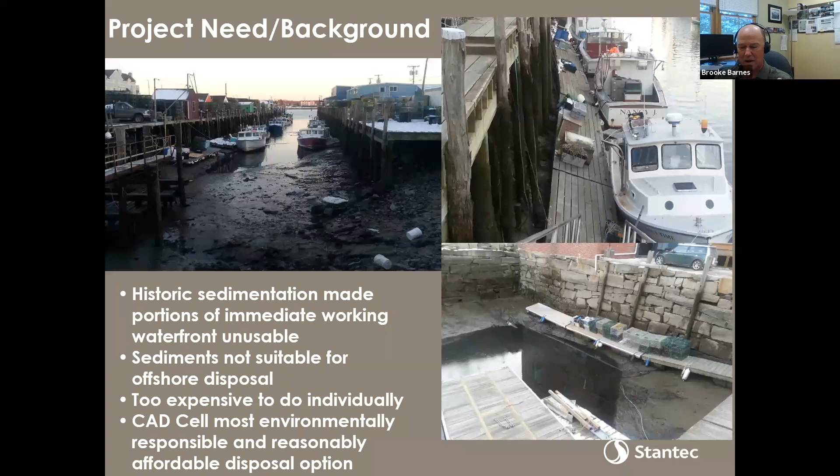If you want to go to the next slide, Michael. This concept of a CAD cell - dig a hole in the harbor and put these materials in it - has been around for about 30 years. It's been done in Boston, Bridgeport, Hyannis, Providence, New Bedford. It's the least expensive option, the best from a human health and ecological risk perspective, and it's simple. There's been a great deal of post-construction monitoring to make sure the concept is actually working out, and it's working out very well in those places that have been done before.

Back to Portland Harbor, this is just an illustration of what's been lost - in red, basically not really viable berthing anymore, and yellow, diminished berthing. This is just one piece of the Portland waterfront. It doesn't represent where all the dredging will occur, but a 26% loss in the working waterfront is quite a bit. The idea is let's get that back and get everything associated with it back. Roll to the next slide, Michael.

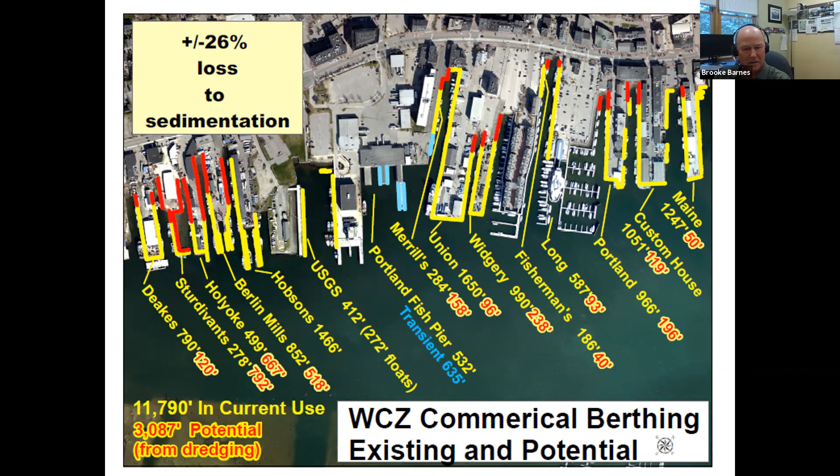The biggest thing when you're trying to figure out what to do on a scale like this is you need to engage as many stakeholders as you can and make sure you're covering all the people who need to be covered and have an oar in the water, so to speak - both from a regulatory agency perspective, but also the users and the municipalities of Portland and South Portland and the Portland Harbor Commission. Those three entities really were the movers and shakers behind this. If you roll to the next one, Michael.

So the permitting itself needs an Army Corps permit, needs National Marine Fisheries Service review, needs DEP, needs local permits. There's really two projects.

One of them is the dredge project around the piers, and the other is the CAD cell itself. They were permitted as two separate projects, but of course they're completely interdependent, and that was recognized through the permitting process. But it took a lot of meetings with agencies and a lot of meetings with stakeholders to figure out what the best path was, and what specific regulatory requirements would apply.

This is the first time this has been done in Maine, so it was new to the jurisdictions. And the final concept we came up with was the Harbor Commission would actually be the applicant for these activities, along with the cities signing on, but the Harbor Commission was going to be the key mover.

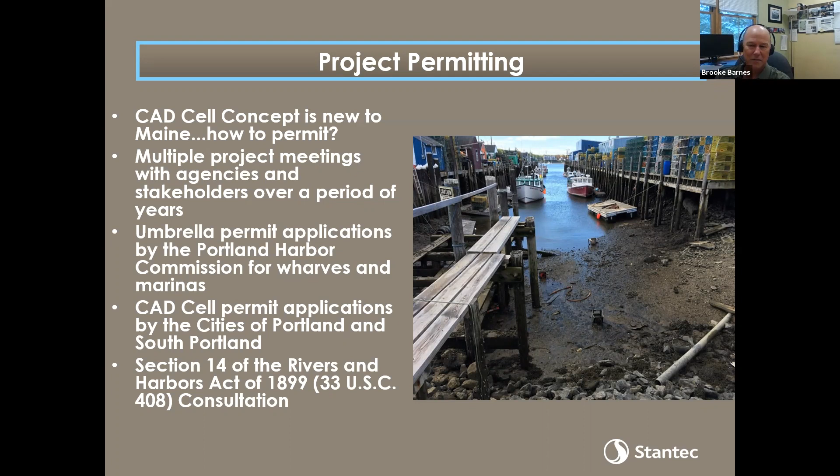So where did the money come from to get this started, to get these early stages? A brownfields grant to the Harbor Commission, focused on the dredging, and that was the first time the brownfields program at EPA was used to look at this kind of issue. Then CAD cell funding, evaluating that, doing the permitting and everything for that, came through MDOT funding and funding from the cities of Portland and South Portland.

So it really was multiple entities and multiple funding sources that got us to the place we are today, which is permits in hand and now seeking the funding for construction.

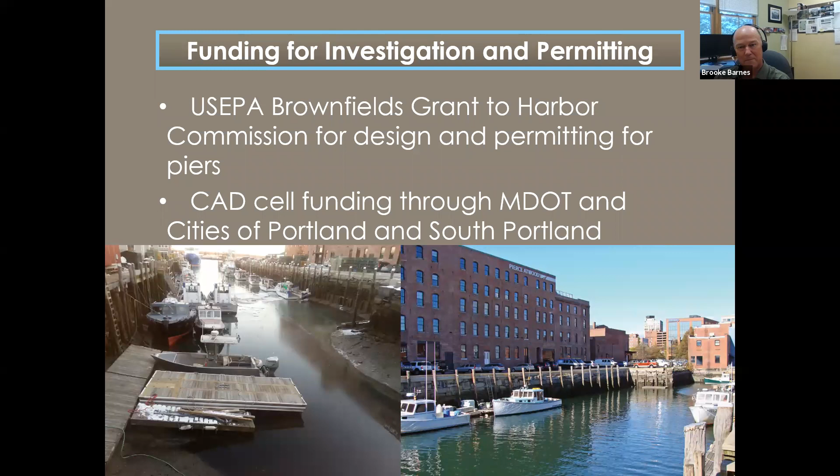Back to this overview, we'll pop this on a couple of times so you can keep taking a look at it. Michael's going to pick it up from here, and he's going to talk about what we did to evaluate the locations, volumes and contaminants for dredging, what we did for CAD cell siting. Multiple locations were looked at and how those were winnowed down to the final selection, and then some information about the CAD cell design itself.

Take it away, Michael. Thanks, Brooke. A lot of material to go through here, so I'm going to scroll through it relatively quickly, but I'm happy to discuss any topic more in depth during the question and answer session.

I want to give another shout out to the city of Portland, South Portland, the Harbor Commission. They've been really running with this for 10 years now, doing a lot of the legwork. Brooke and I are presenting on it, we did the permitting and investigations, but the cities and the Harbor Commission have been heavily involved all along. A lot of hours on their end, and shout out to our engineers and sub-consultants that really helped us get where we are today with two permitted projects and hopefully a path forward for funding.

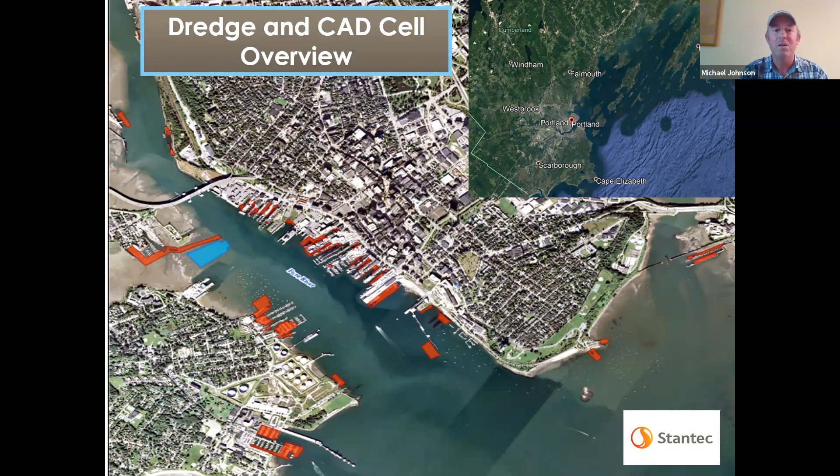I'm going to start going through the dredge project with a few slides here and then transition over to the CAD cell. The dredge project, as Brooke mentioned, had investigations funded by the EPA Brownfields grant. We worked with Campbell Environmental on that.

Initially starting off, there was a lot of outreach needed. As you can imagine, there's a lot of different ownerships across the harbor, on the South Portland side. Every pier is not owned necessarily by one owner. You have the snapshot below of Custom House Wharf and Portland Pier, and you can see there's multiple owners there. So a lot of the upfront work was identifying the owners, getting spreadsheets together with contact information, and having kickoff meetings and outreach. That was quite a bit of effort on that end.

And what we really were after was their desired depth. To start this off, we did a bathymetric survey of the whole harbor, so we knew what the existing conditions are.

And then we set up these orange polygons, which are associated with the tax parcels, and sat down with each owner to determine what depth they would like there following the dredge. Based on the existing bathymetry, we're able to calculate both the dredge area, highlighted in red there, as well as the target dredge depth for each of those.

Cumulatively across the harbor, you add all those areas up, and that gives you a total dredge volume. That dredge volume is what informs the size of the CAD cell.

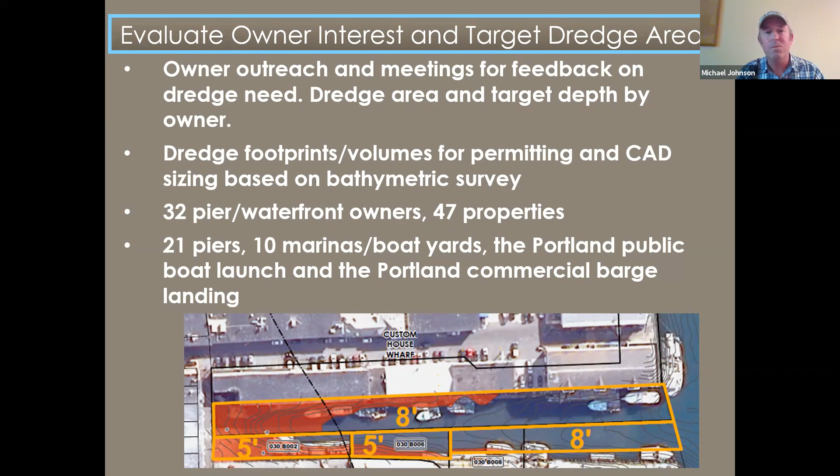So we've identified those dredge areas, and we sat down with the agencies and talked through what testing we need to characterize this material. We pulled together a sampling analysis plan for metals, PAHs, pesticides, and PCBs. We got out there in the harbor with a vibrocore and sampled down to the target dredge depth at each of these dredge areas.

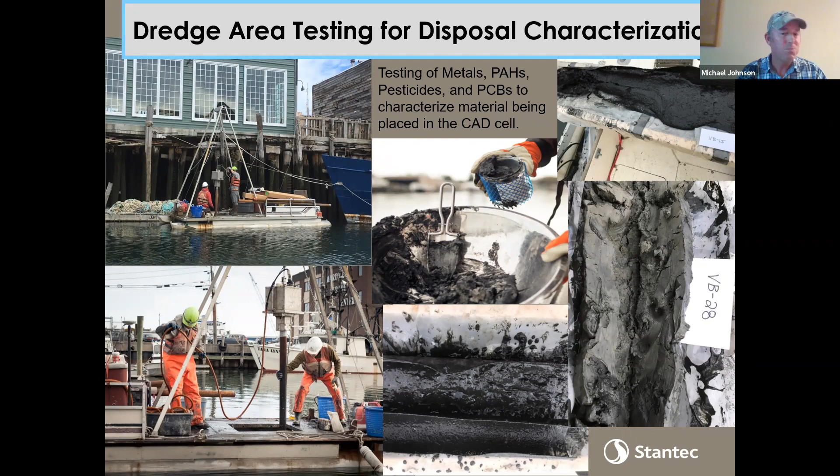The other major component, which took quite a bit of bandwidth from us and the team during the process, was eelgrass mitigation. I want to touch briefly on a lot of lessons learned here. Two of the dredge areas had unavoidable eelgrass impacts. One was the East End Beach Barge Landing, currently the landing point for all commercial truck traffic to the Casco Bay Islands, as well as utility vehicles, emergency vehicles, and storm response, and it's currently restricted tidally. So the goal is to dredge that area out for all-tide access for those vehicles, but there's an associated eelgrass impact with that.

The other one is the main access channel to the Spring Point Marina in South Portland. There's a large eelgrass bed between there and SMCC, and that bed has migrated into the channel as sediments have come up and depth has decreased. So, two eelgrass impact areas.

Originally back in 2016, we had assumed in-lieu fee payments associated with those impacts, but as we got into permitting, we sat down with the Corps, NMFS, and EPA, and they really pushed for owner-sponsored mitigation, because there's no eelgrass projects in the in-lieu fee queue now. So they wanted to see these impacts restored.

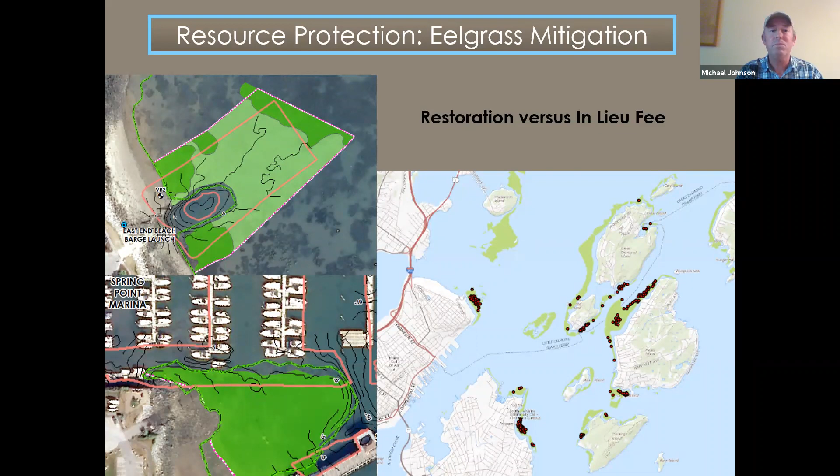Transitioning over to CAD cell siting here. Again, this is the first CAD cell permitted in Maine, in Portland Harbor, and there's another one in the queue up in the Blue Hill area, but this is the first.

Talk a little bit about CAD cell siting. We came into the project in 2016, and there was a non-federal working group that had been working for several years looking at alternatives for dredging and disposal. A CAD cell had risen to the top as a preferred alternative, with Fish Point off the Eastern Prom as the desired location. There had been some sub-bottom profiling there indicating sufficient depth of sediment.

So we came in thinking, okay, we're going to move forward with Fish Point with additional investigations, but we very soon realized there was going to be pushback there because of the lobstering effort and some environmental concerns with that site.

So we went back to the drawing board, kicking off the project with a big stakeholder meeting in July 2016 with the fishermen, environmental groups, pier owners, and other waterfront stakeholders. We identified alternative locations in and outside the harbor, then ranked each one based on technical considerations for construction and engineering, environmental habitat and fisheries, as well as permitting, public feedback, and public uses for each site.

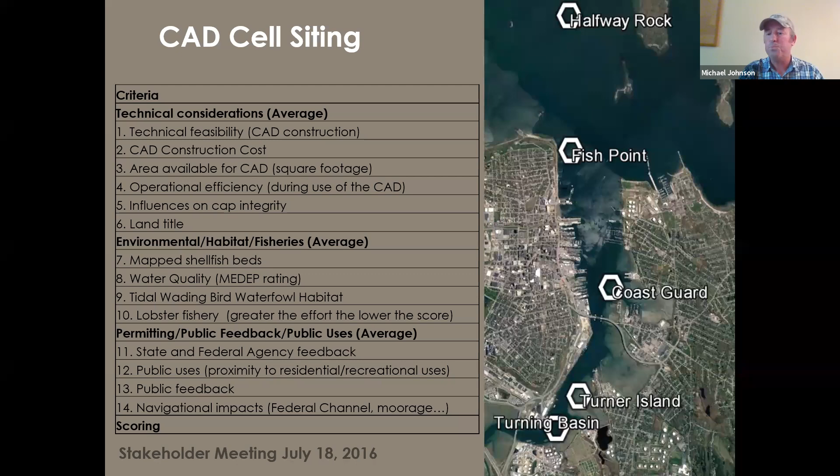This little table shows the scoring related to that. As you can see, the Coast Guard site, located between the Casco Bay Bridge and the Coast Guard facility, ranked the highest.

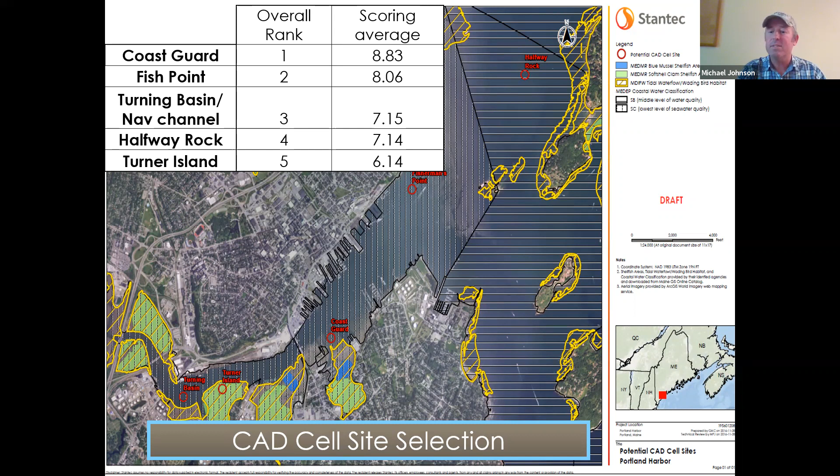It avoids impacts to intertidal areas, the navigation channel, and intertidal and wading bird waterfowl habitat. There was also concern from the Corps about siting a CAD cell within the federal channel, which included at least one of the sites, because of future dredging there. So after this process, with a lot of engagement, the Coast Guard CAD cell site was selected as the preferred alternative.

A little bit about CAD cell construction as an overview. The schematic on the left shows the digging of the CAD cell using traditional clamshell technology. You dig the CAD cell with side slopes down to your target dredge depth.

For this project, we're proposing that to occur over one year during the seasonal dredge window, November to March 15th, to get that excavated. Then we're proposing a four-year dredge window within Portland Harbor, also during that seasonal time, to fill the CAD cell to capacity. The design of the CAD is below the existing grade, and it will be allowed to naturally cap over time with sedimentation.

And as Brooke mentioned, the excavated material from the CAD cell was found suitable for offshore disposal at the Portland disposal site.

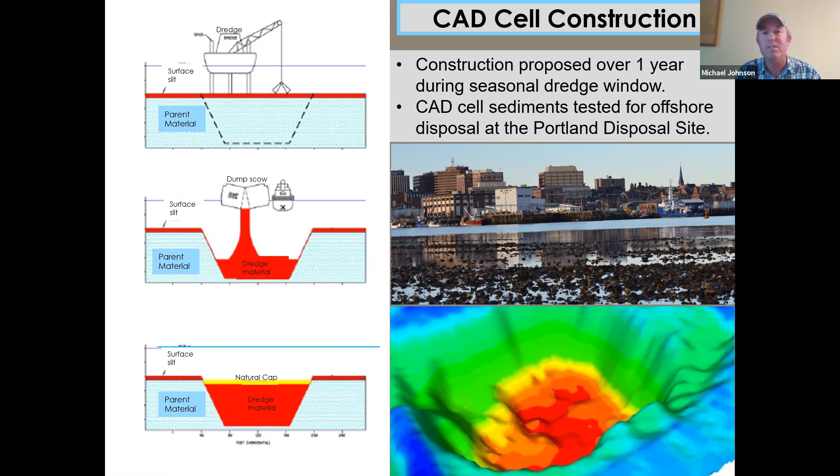A little bit about the CAD cell - we kicked this off again with more agency consultation. What information do we really need to collect out there to characterize the site, from both a permitting perspective and an engineering and design perspective?

So we did habitat evaluations and dive surveys, video camera work - it's a very shallow subtidal flat located between a dredge area at the Coast Guard station and the access channel to the Spring Point Marina. The shallower portion of the site has been populated by European oysters, a non-native species, and the outer portion is exposed sandy silt with abundant green crabs.

As part of this process, we also did lobster dive surveys of this area.

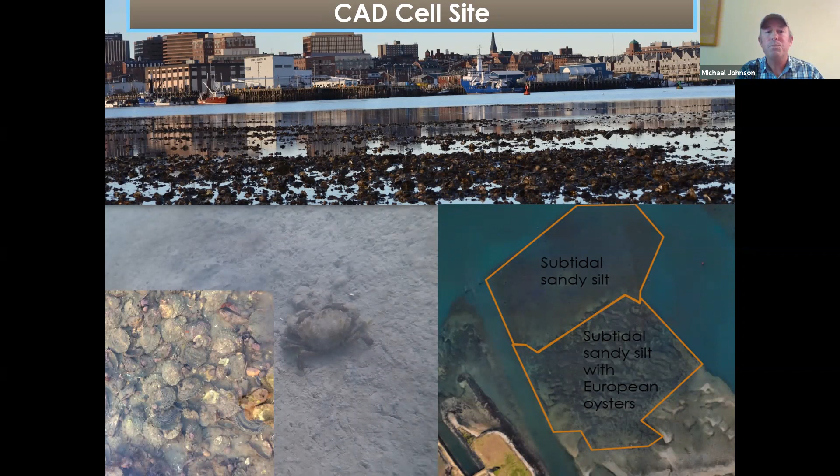Getting into the geotechnical sub-bottom piece, the key criteria for siting a CAD cell is sufficient depth to bedrock. As many of you are familiar with Portland Harbor, there's plenty of ledge outcropping. So the first step was to do the sub-bottom profile - there's an image of that on the bottom of the slide, showing the different sediment layers as well as the bedrock depth. So we started with that.

Very promising, with sufficient depth to build the CAD cell. We went back out and did a geotechnical boring in the middle of the CAD cell, highlighted in red on the sub-bottom profile. That confirmed the findings from the sub-bottom: sufficient depth to bedrock and multiple layers of sediment, or sediment horizons, over that bedrock, including a large mass of the Presumpscot Marine formation, which is a clay.

That photo on top shows, between the water and the blue line on the profile, a surface layer above the Presumpscot formation, which is sandy silt, with a very clear boundary between that layer and the native clay underneath it. That was fairly uniform across the site.

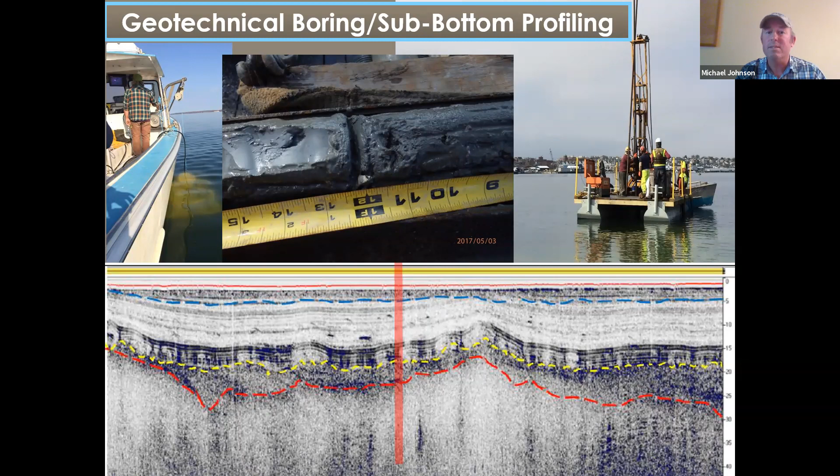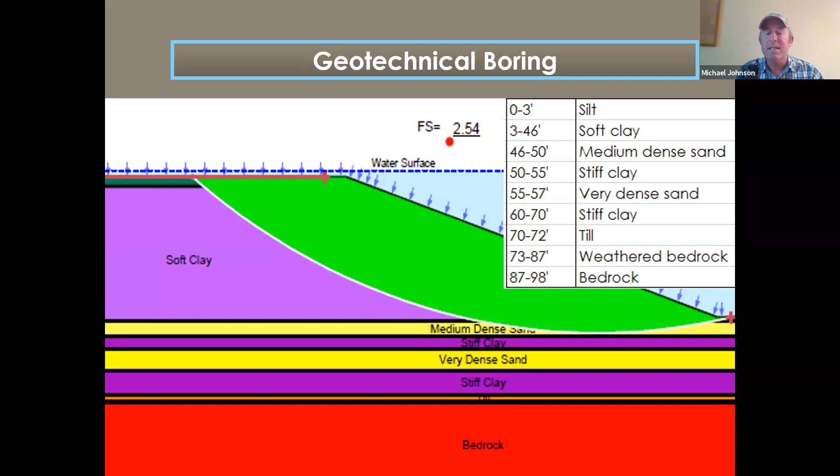Just a little schematic here showing that soft clay layer - our CAD cell is primarily located within that. We really didn't get down into till until around 70 feet below mud line, with weathered bedrock at 73. So, a good site with sufficient depth for the CAD cell.

Back to the sediment testing - a key problem with CAD cells is that they're sited in urban locations to begin with, so you'll have surface material that's often not suitable for offshore disposal. You end up trying to figure out what to do with that. You want to characterize it, find out the depth of that anthropogenically impacted sediment. A lot of times that will either have to be held on scows, or you could do a sibling CAD cell, a smaller CAD cell off to the side just to hold that material. As you can imagine, that's a large cost - our estimates were that it would add basically $1 million to the project.

So we went out there. This CAD cell is sited closer to the navigation channel, not within the inner berths where we saw some of that dark, more contaminated sediment. We did some vibrocores down through that surface material and worked with the Army Corps in the RIM process to get that tested. Luckily it passed its toxicity and bioaccumulation tests and was found suitable for offshore disposal, which was a big cost savings for the project.

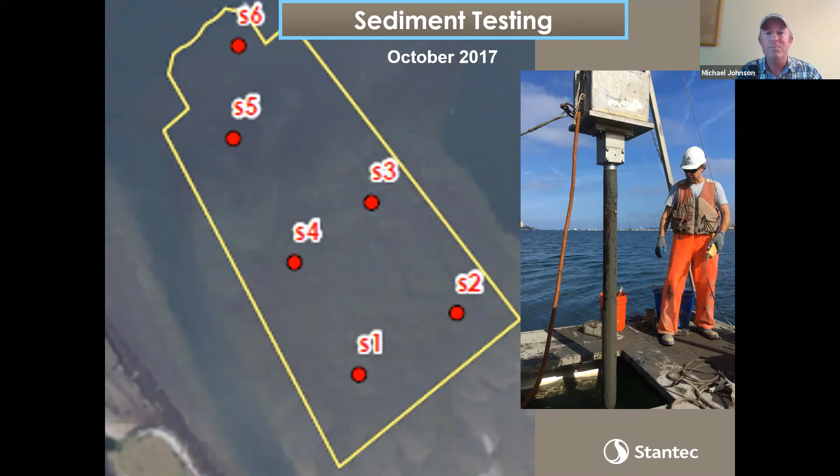Just reviewing the CAD cell design here. The CAD cell itself was about 9.5 acres, 800 feet long by about 400 to 600 feet wide. Because the CAD cell is below grade, more material is being excavated than what we're putting in. So around 376,000 cubic yards of material, and we're dredging down to about 50 feet below mud line.

A couple key features here: you'll see the access channel. On the left there, that's the Fore River, the Federal Navigation Channel. Because this area is so shallow, we're going to have to dredge our way into it, so that access channel will allow full tide access during disposal. Other features were designed with a 3-to-1 side slope, and designed outside of the intertidal and wading bird waterfowl habitat.

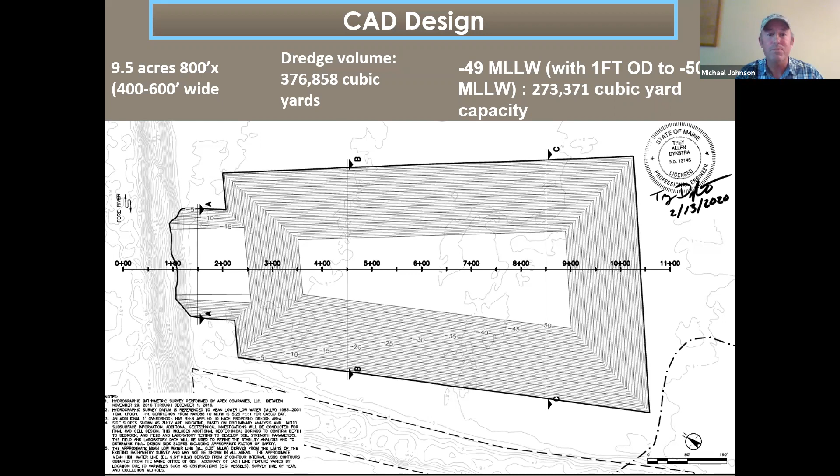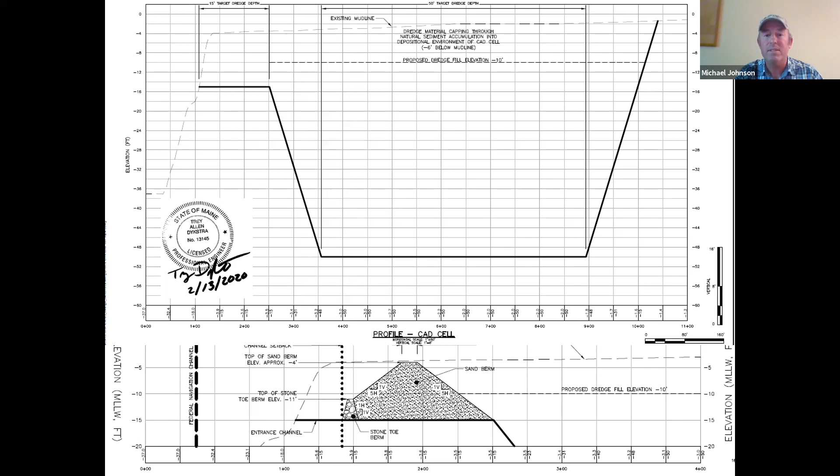Here's a profile of the CAD, and then just a little detail on the entrance channel and what it will look like at the end of the project. We engineered an entrance berm across that channel, and by year 4, as the dredge materials reach capacity in the CAD cell, this entrance berm will be constructed, including a stone toe berm and suitable materials to close off the CAD cell from the navigation channel and allow for a little more capacity.

Project construction, scheduling, and funding: as we mentioned, we received permits for the project this spring. We are busily working on the RAISE grant application. Harbor Commission and Portland are very involved with that right now, with a couple of weeks until putting that grant submission in. That's through the US DOT.

Assuming award, we'll move into final design and bid specifications in 2022. That will involve some additional borings at the CAD cell, as well as putting those bid packets together and getting it out to bid. There's a couple alternative schedules depending on consultation with MARAD and finalizing grant award, but in the best case scenario, CAD cell construction will begin in winter 2022, with 4 years of dredging following that.

As I mentioned, the bulk of it would come from the RAISE grant, which was the former TIGER and BUILD grant under previous administrations. That includes a local match, and that local match will come from tipping fees. So each of the owners will pay a tipping fee based on cubic yards of material placed into the CAD cell.

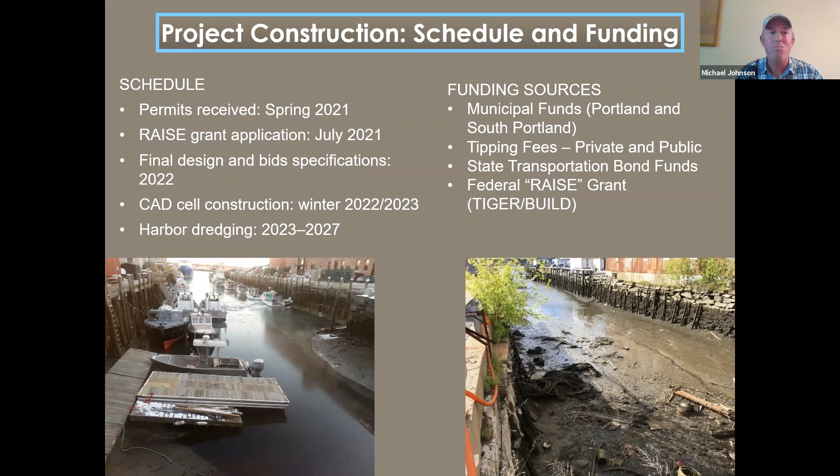Well, let's look through that. Now for questions. There was plenty to talk about on all those topics, if anybody's interested in more detail.

Oh my gosh, I'm right on time, 12:30. Yeah, way to go, Michael. There's a ton of good stuff. Yeah, we spent months on some of those topics, so if anyone has interest in any of them, I'm happy to speak more about it. That's a really great presentation, a lot of great detailed backstory, really took us through it.